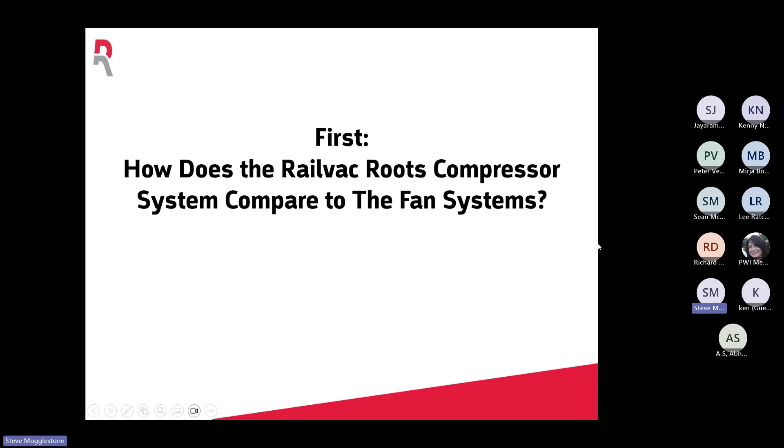So firstly, how does the roots compressor system compare to fan systems? A fan system - I won't go through it too quickly, it's not my forte, but I can send you a copy of this for you to read through. Basically, a fan system uses the auxiliary system on a truck PTO, a power takeoff from a truck, mostly road rail version - nearly all of them are road rail versions - and that powers 2, 3, 4 fans, and it's the fan that generates the airflow. It consumes the most energy when the suction line is open, so as soon as you block the system, the power dies down.

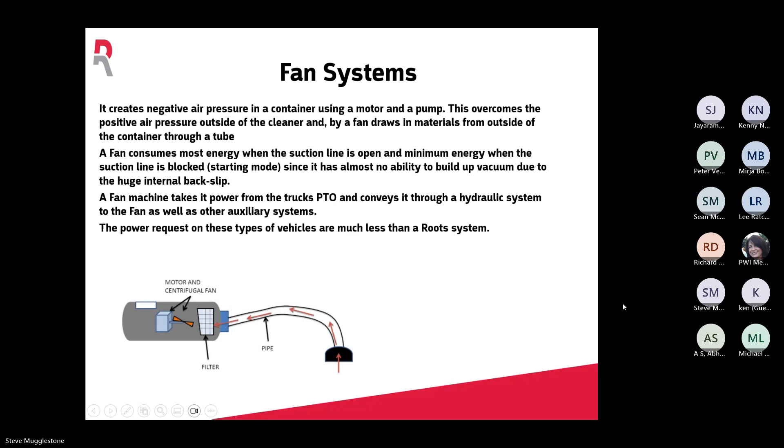The roots system has a big rotor inside, 2 big rotors like a hydraulic pump, turned by a marine engine, a Cat marine engine. So we have an engine to move the machine up and down on the track, and a single engine to generate the airflow. It's 2 intertwining rotors that spin very, very fast - that creates the airflow. If you block the nozzle on this, it builds up the pressure.

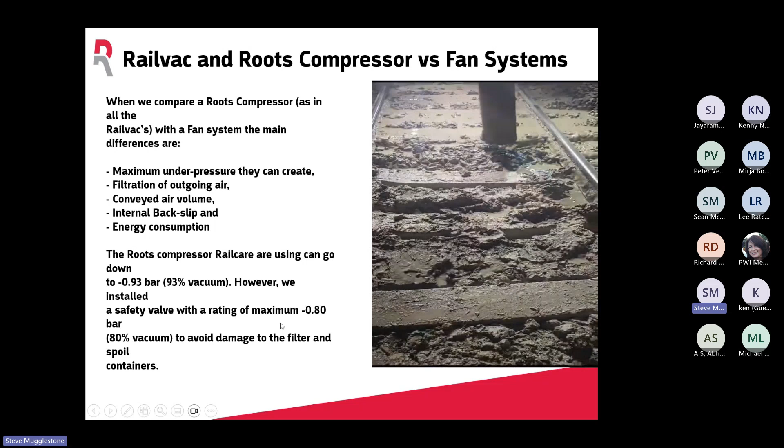So when we compare the roots compressor to the fan systems, the roots compressor generates 0.93 of a bar, 93% vacuum. That's massive power, so we have to install a safety valve and we knock it down to 0.8 vacuum, 80% vacuum, so the filter hoppers and everything doesn't get all sucked in.

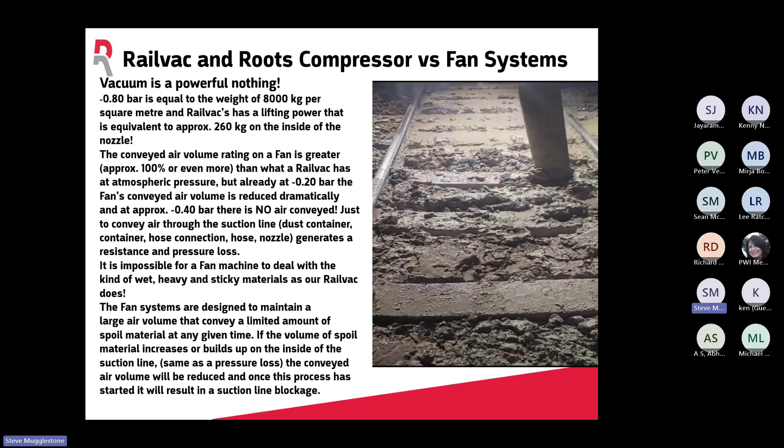I won't read all this to you, I know it can be a bit boring reading text off a presentation, but you'll get this presentation so you'll be able to read through it at your leisure. This is about the air filtration on our machines. It doesn't matter how much filter material we put in there, we control it and take out 99% of all fines passing through. In a fan, the more filtration you put in it, the less power you get at the nozzle.

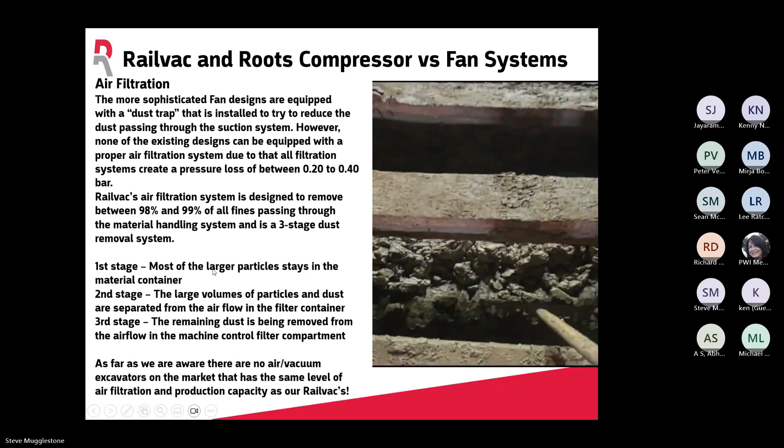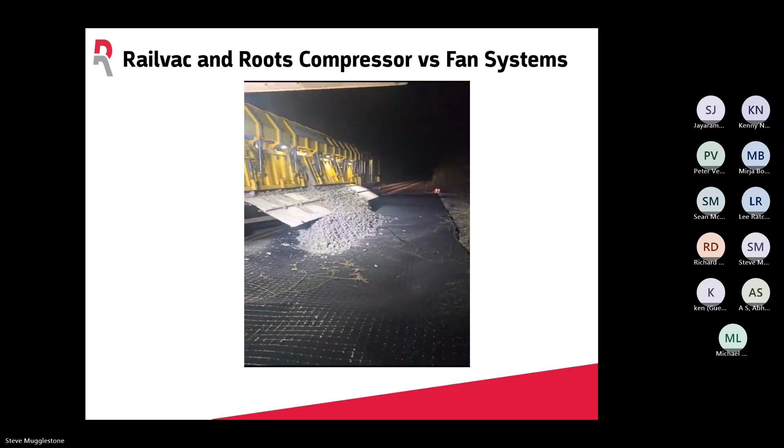There we go - so there you can see us working there. That's it tipping out the sides, it tips out of the sides. And then we're back to work on site. That then is loaded up into a train. Simple process, doesn't take any time.

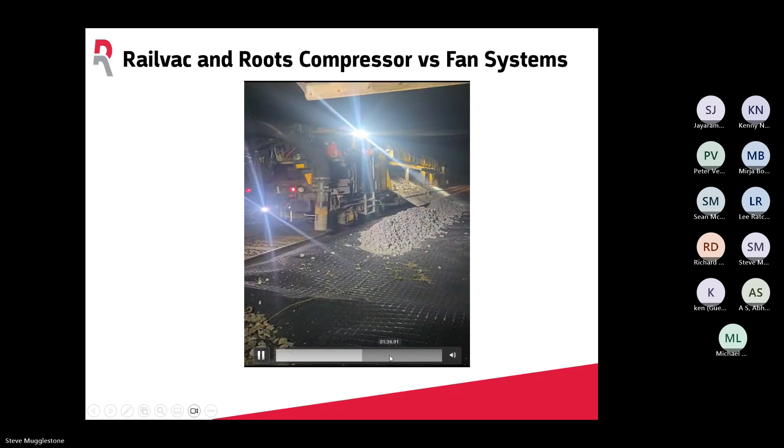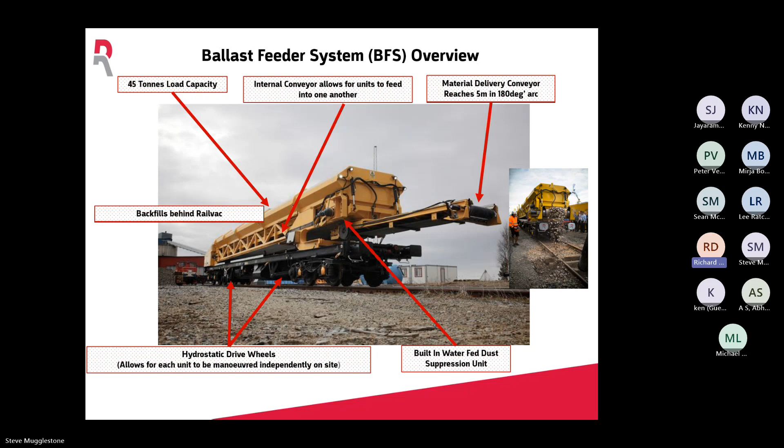And the spoil handling, as you saw in the video earlier, it tips out the side currently, and some people don't like this - they term it double handling, or they don't like the spoil going back on the track side. Typically we'd bund an area with the terram as you saw there, or dig a trench in the 6-foot area and keep discharging the spoil.

And again, what that will do is improve productivity. We don't need overhead line isolations, we don't need to on-track and get machines down to site and back again, thus cutting down the available times you have midweek. Most everything, as you know, is worked weekends only, and it's a bit of a nightmare - it gets congested.

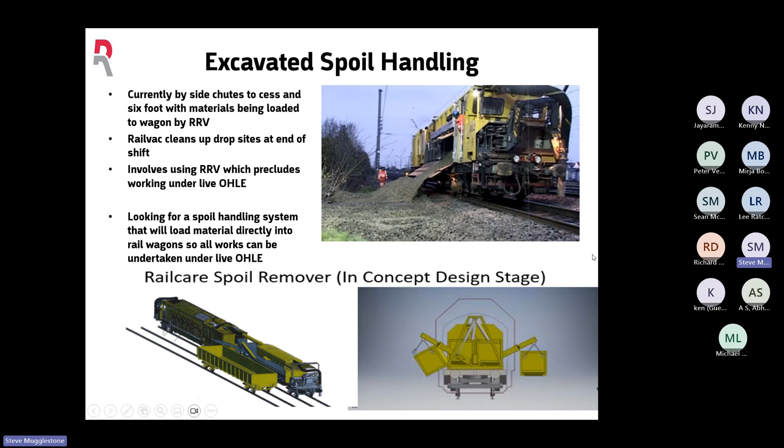This is one of the big things we need to talk about - the quality of the excavation.

Typically when a railvac's been to site, like I say to people, it's basically a big shovel. It'll do what you want it to do, dig as deep as you want, put a crossfall on, etc. But the engineering personnel have got to monitor it and tell it - it's a dumb shovel. If you tell your shovel to dig in some potatoes and you want them 300 mil deep with the tops mounded off, you have to tell it - the machine doesn't do it. So basically, the technical side of it is down to the client and the technical guys on site.

We talk about stiffness and what we do about compaction, and what we do about excavating transition ramps. Well, we can do all of this. We need the transition ramps to avoid sudden stiffness change and ballast memory.

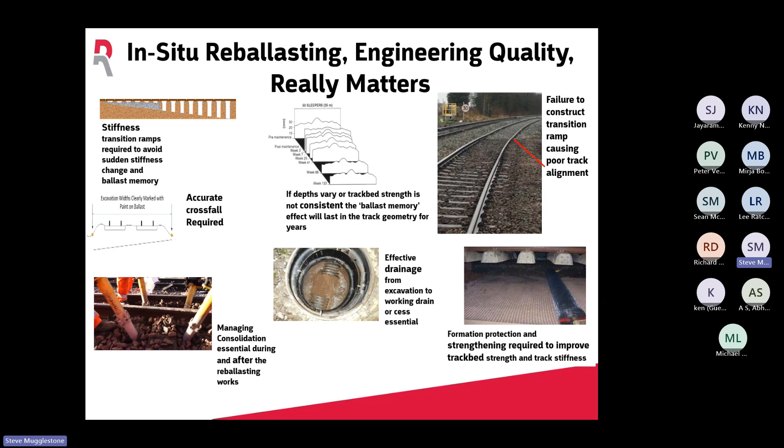So this is the rail vac. Can it excavate design depth and crossfall on the plain line and S&C? Yes, it can.

Can it excavate transition ramps? Yes, we can install them. People say, oh no, we can't get them in. Well, you can. There's a method that we use, and it should be used on every job. But again, alas, it's not, I'm afraid.

Can it excavate the shoulder and cess? Yes, but again, very, very rarely is it ever utilised to do that job.

Can we install filter or strengthening materials? Yes. Can we clean out existing drainage pits or install new drainage? Yes. Can we investigate drainage? Yes.

The client needs to provide technical support to set up the laser for excavation works that we can do. So like I said, we can use 2D laser systems to manage depth and crossfall. We put it on our nozzle and we can work away quite merrily. The rail vac won't do this job for you.

You have to do it yourself. There's just a bit more information - other in-situ re-ballasting systems don't have these capabilities.

I've been out with this machine since 2004, so I see different areas, different people all the time, and it's variable around the engineering quality and delivery throughout the delivery organisations. But it needs to be standardised and it needs to be done in the right way, and it's got to be engineering quality. It's essential that we get that into this, and we can do it.

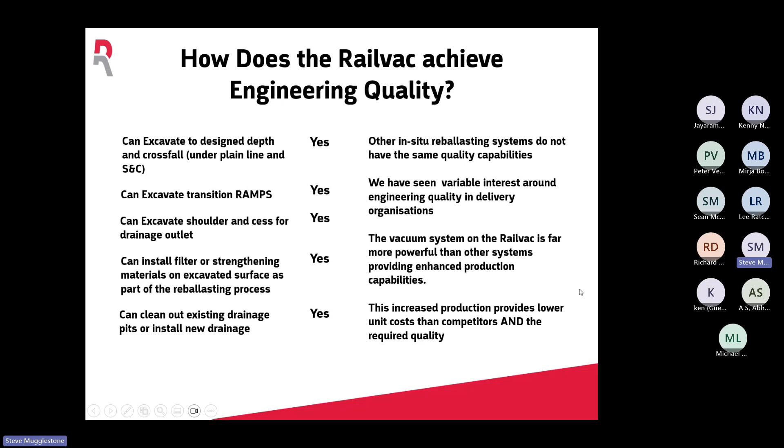Might be worth me getting some information off you then for my engineer to pass on, because we've really struggled with this site - we've had cyclips up, ESRs on it, TSRs on it. It's a real problematic site, but knowing that this kit could potentially do that is another good thing. Oh absolutely, you just contact me and we'll come out and have a look and sort it out for you. That's great, thanks Steve. Cheers, all right Richard, no worries.

So again, this is how we construct the ramps. Basically, mark out the ramp length, whatever it's going to be. Most people stick to the standard - let's just put a 5 meter ramp in. So we mark it out, calculate the number of sleepers - 5 meter ramp, you're talking about seven or eight sleepers. Mark the original positions of the sleepers on the tracks.

You can see there in the yellow marks. Then the track personnel remove the clips, take out the insulators if they're there, and any pads, then put the old clips back in. The rail vac then will dig to the depth.

So if you're taking it over 7 sleepers, it's 300 divided by 7 - you're talking 40 odd millimeters increase in depth, so from 0 down to 300 mil over 7 sleepers. He'll excavate to the required depth, and then what he'll use is the nozzle to just bump that sleeper, because it's got no bearing.

If you need a jack in there, we just ease it with a jack. He bumps the sleeper up, and then he can take off the stools and maintain that rake down into 300 mil. He pushes the sleepers back. The ballast then automatically starts coming in behind us, so as soon as we've got 3 or 4 bays done, that'll be filled up, start filling up with ballast. The guys then will Robel it off.

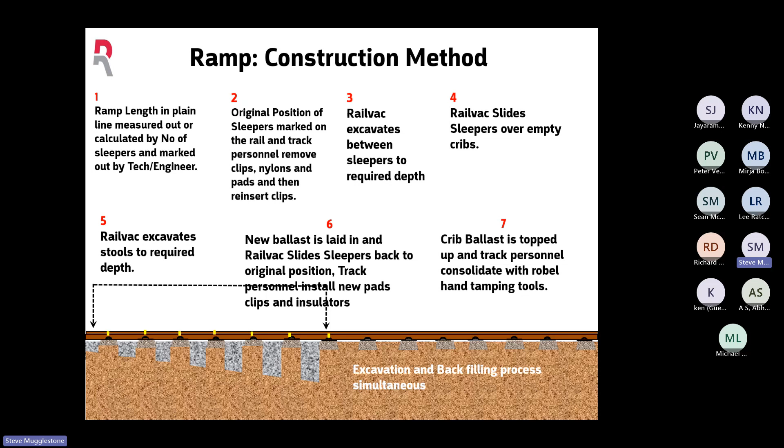We put the jacks in, take out the old clips, new pads, new clips and new insulators, and then we carry on with the 300 mil. It takes about 20 minutes to do a 5 meter ramp, so there's no extra time at all. But people tend not to do it properly - they'll try and put the nozzle underneath the sleeper and say it's been undermined, but it's not good enough.

Depth and crossfall control, as you can see, 2D laser system. There's one on the rear of the nozzle there, which you can't see where the operator's looking. There's another remote sensor on the back that picks up from the front, so you can put 2 or 3 around the nozzle, and you've got sight of what the lights are doing, whether it's too deep, too shallow, or spot on.

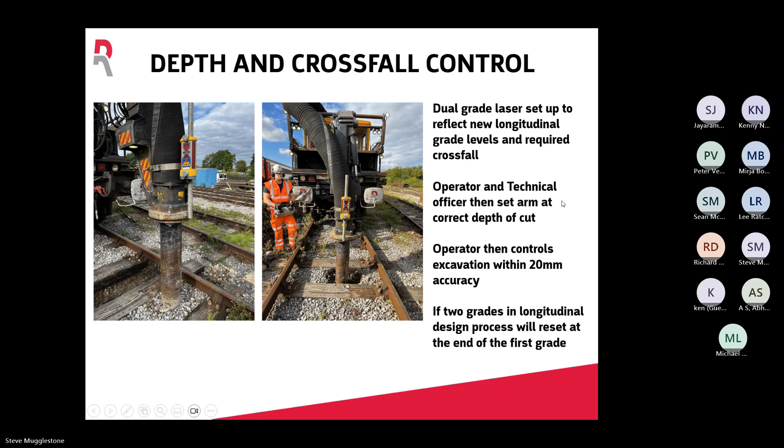So again, we can control the depth to cover another engineering question, and improve the cut surface. We use the rozzle, a rotating nozzle with a tooth on it. It fits underneath the sleepers, helps remove any kind of stool, smooths out the dig, and keeps the nozzle vertical so you can control the depth of dig a lot better and give a smoother cut. And you're not over digging.

So if you want to dig 150 mil on a siding, or 200 mil on a cat 2 track, or cat 1A at 300 mil, then this allows you to do it. That's how we've improved the machine since we first had it back in 2004.

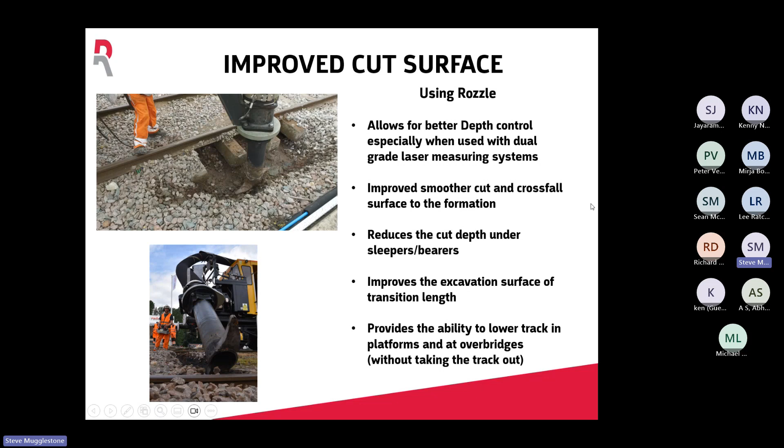And again, results of poor quality. This is a job again - this was up near Hull. This was the day after. This had been re-ballasted, and there'd been some maintenance and refurbishment done through the bearers, etc.

And when they can't improve the track quality on this, the first thing they say to me is it was a rail vac job, and then people tend not to use the rail vacs. But this is the day after we'd re-ballasted through this set of points. You can see the new ballast there.

And yeah, again, these are all the failures: lack of machine excavation control, lack of proper consolidation management, no ramps, no alignment design. And again, they put new timbers in on the heels of these, and you can see the alignment is a little bit poor.

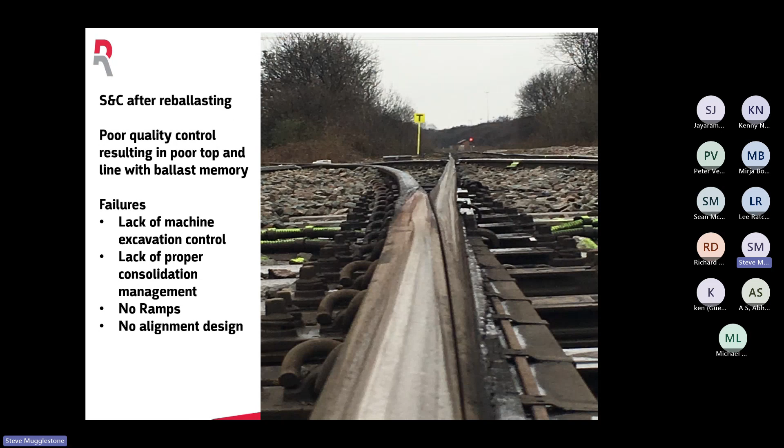So the rail vac digs out ballast, but you have to tell it how to dig it out. And I see this quite frequently - I must have 1,000, 2,000, 3,000 photographs of poor track that's been done under refurbishment. So the rail vac can't line that rail up, that's for sure.

And again, consolidation. It's difficult to consolidate when you're doing track in situ, but when you use different materials like geogrids, geowebs, and basically put all the ramps in, etc., and get the alignment right through the S&C as you've refurbed it, your track geometry should be fine.

It should be absolutely fine. I've handed track back to 80 mile an hour just with rail vacs. As long as you monitor and keep an eye on things, it's quite easily done now. People work on a job at the weekend, walk away from it thinking they've renewed it, and nobody ever maintains it for another 6 months - it's not really the best thing.

So again, it's about - we usually put void meters on, managing the voiding, if any. The most we've ever seen the track drop is 8 millimeters; we've never seen it drop below 8 millimeters. We've never had any incidents where we've had a poor twist due to the rail vac, etc. But consolidation is one of the engineering questions we get asked about. Again, if we do the job correctly with the tools we've got at hand, you should never ever have a problem.

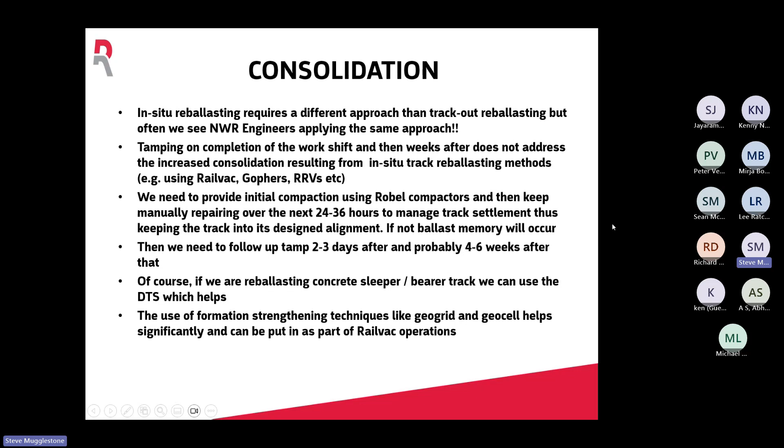So that's basically the engineering quality side of things. And then I'm just going to talk a bit about the versatility. It's not just a one-trick pony - it cuts across all disciplines on the railway, as you can see there: electrification and signalling, drainage, maintenance, plain line, S&C, civils.

So it digs a 1.5 meter cubed trial hole in 5 minutes, yet we still have tens and 20s of guys going out there digging 1 or 2 holes a night, every night. For drainage, it can excavate 40 meters of drainage per hour. We can drop the drainage rates down by about 50% currently, and down to about 70% if we build our new system.

Plain line, as I said, 6 to 10 meters per hour to 300 mil below bearer bottom, sleeper bottom - we can do that. For S&C, a 9.25 crossover, we can excavate and reballast that in anywhere between 8 and 12 hours. A D switch, again, 12 to 14, and so on. These are crossovers, not just a point end.

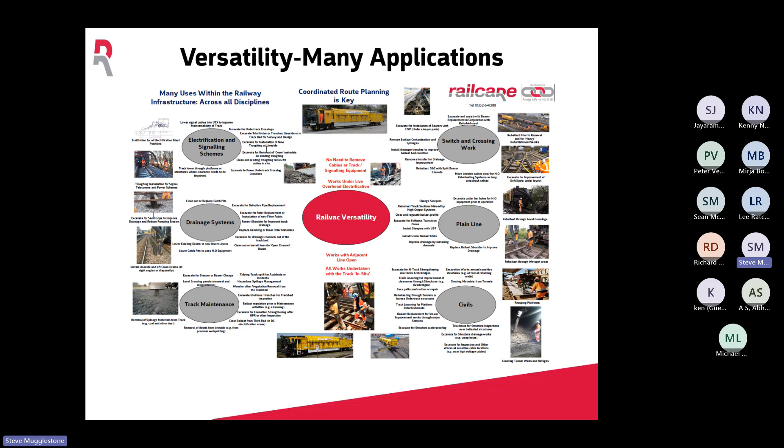And here we've got the activities. Can we do this? This is basically for Network Rail, for the industry. Reballasting, do we do this? Yes, it's used in the UK. Reballasting for plain line refurbishment, not as much as we'd like, although we are getting more and more jobs.

Replacement of sleeper bearers under S&C - we don't do any, manpower still digs it out by hand. We can excavate a 24-foot bearer in less than 9 minutes with 2 cribs and get underneath it in less than 9 minutes.

Refurbishment of drainage, we've done a few. If they go out with the jetting systems and find a blockage, the rail vac could go in there, open it up, change a piece of pipe, lower an invert, raise an invert, change a catch pit, whatever it needs. The rail vac can do that without damaging the rest of the system. Enhancing drainage, the use of DTS 400, we've done some trials of that.

So all these things there, you can see there's lots of yeses, but there's lots of no's.

The computer's died now, it's not clicking on.

So every no on there is a missed opportunity for Network Rail. It's as simple as that. We need to get some joined up thinking and joined up planning, basically.

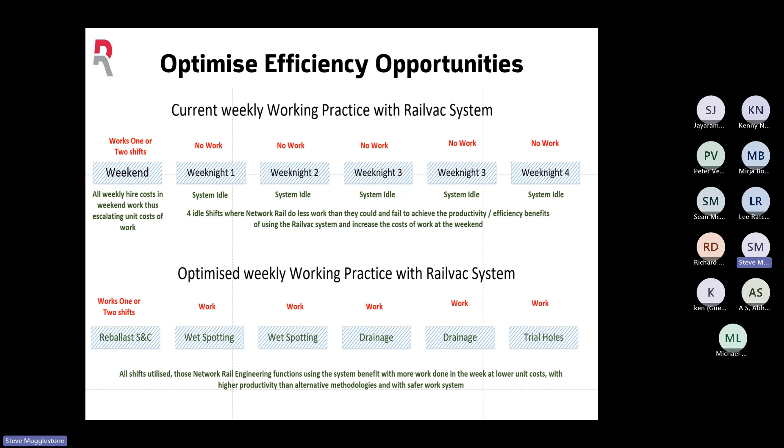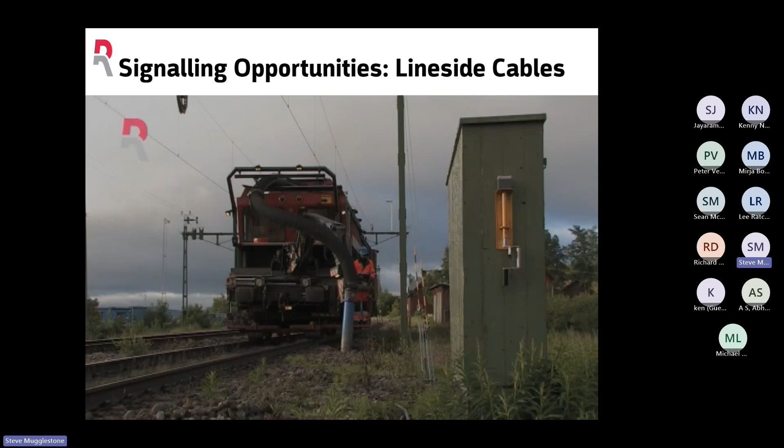And here we have this - us working with line side cabling. In Sweden, they don't bury the cables in ducting, they just bury them out of the way. With the rail vac, because you're not going to damage them, you can open them up. They never get stolen in Sweden, that's for sure. You can see how gentle the machine is. Since 2004, we've never broken a cable or a service that's been attributed to the rail vac on any of our sites.

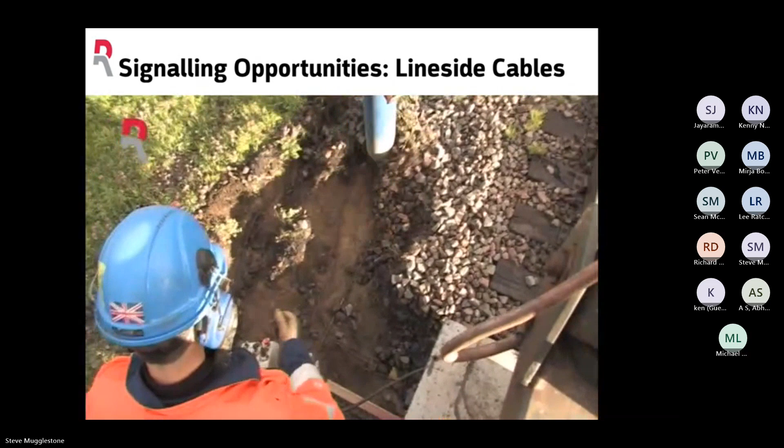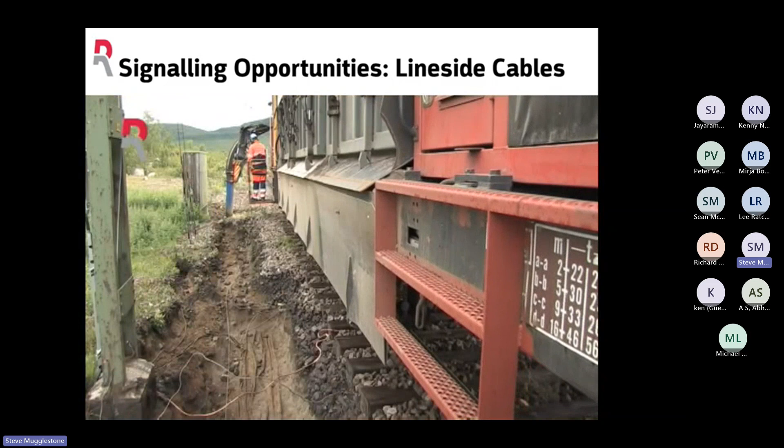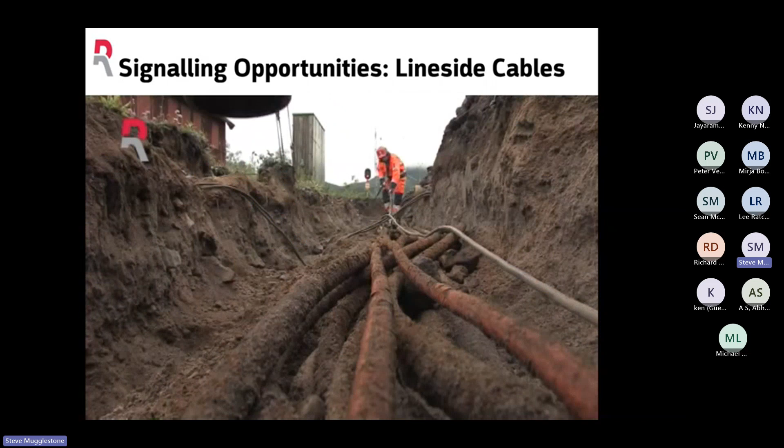So basically the job they're doing here in Sweden is locating existing cables, then they'll move them or bury them or install a new cable prior to any bank profiling, machinery, digging, excavating, track renewals, etc. In Sweden, Trafikverket know exactly where all their cables are, because we go out there, find them, and plot them. We know how far away from the track they are, how deep they are, and the diameter and type of the cable.

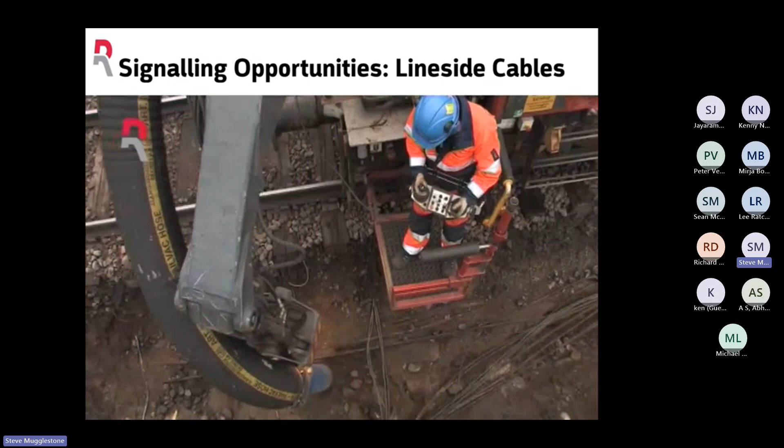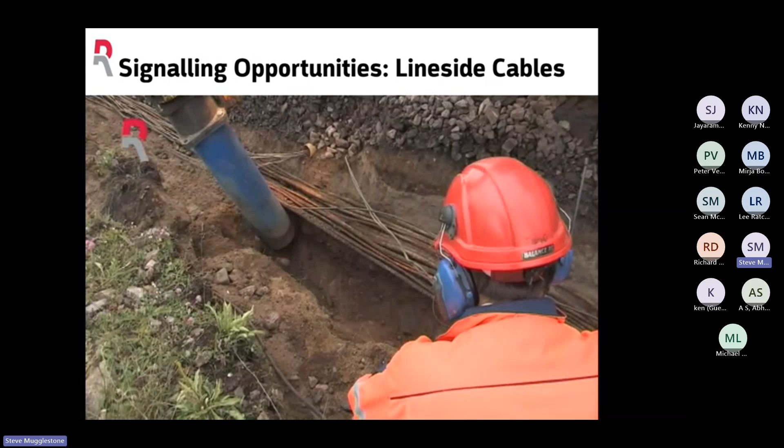So he's just lowering the track now, so when they do the renewal work, you can work quite easily. We've done quite a bit of work locating geotextiles with high output, but like with any renewal or high output system, if you know what you've got in the track before you start, then once we've been out there you can work quite merrily without striking cables, bridge decks and things like that. We can excavate those - it's a simple thing for us to do.

Again, that was signalling drainage opportunities. We're not used on drainage, but we've proved that we can really improve productivity and reduce costs where we've been. These are all the things it can do: maintenance and refurbishment, installing new drainage tracks, enhancing the drainage on a lot of these jobs. It is overlooked, I'm afraid.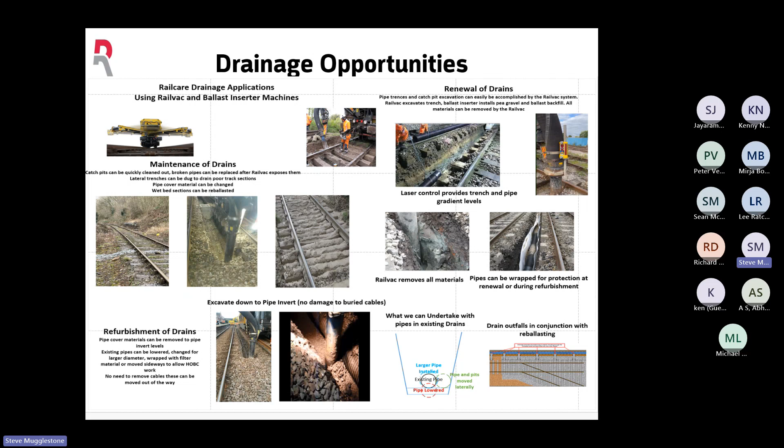It's all right digging 600 meters of plain line if the drainage is no good, but we can combine that along with the reballasting. And again, structures - trial holes there. We did work in Wales, down on the Cardiff Valley lines, doing a 1 cubic meter trial hole. Eventually, when they got their end of things in, we were doing them in about 5 to 10 minutes each.

Drainage trenches - we were doing 5 meter trenches from the end of the sleeper out into the cess, locating all manner of services. There was a high voltage cable they didn't know was there, and a gas service they didn't know was there. But with the Railvac, we located them. Everybody was happy then, they knew where they were, and they couldn't keep up with us with design when we were doing the trial holes for the overhead line structures.

We did one job down there, and then they decided to bring the manpower back in, and they were doing 1 and 2 a night with 10 or 20 men.

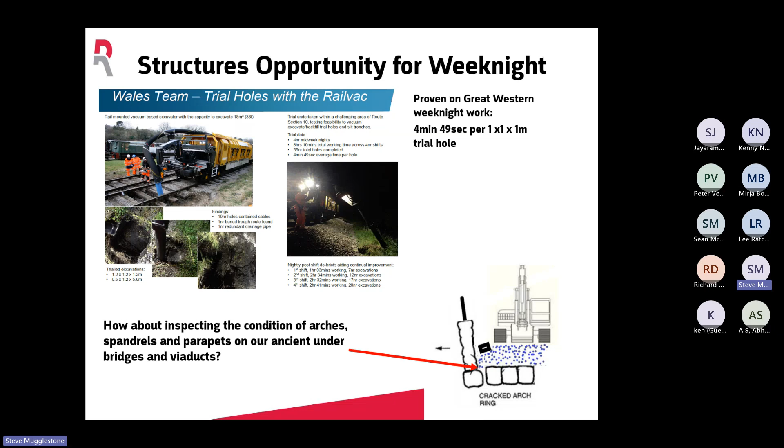So that's a quick run through. In summary, our Railvac is Railcare's most powerful and productive, cost-effective system that's available to the UK rail industry, without a doubt.

It's a proven method. We've been re-ballasting S&C since 2004, and plain line track. Like it says there, we've been serving Network Rail for 20 years this year. It was designed for 7-day working, although it's never been utilised.

It's very versatile, and again its versatility is not optimised in the UK. There's no joined up thinking, there's no joined up planning, so therefore the opportunities are missed.

Work is currently focused on weekend possessions, so the hire rates and production rates are sort of minimised by that. Although on a 24-hour weekend shift, we can knock out some re-ballasting for sure - we'll do a D and E crossover in 24 hours.

We do need more focus on delivery of work over the week. Then we can improve productivity and reduce the costs. And it requires greater collaboration and planning across Network Rail. We'll give the support, no problem with that at all - we do it now. But yeah, it's a great versatile machine, and it's underutilized.

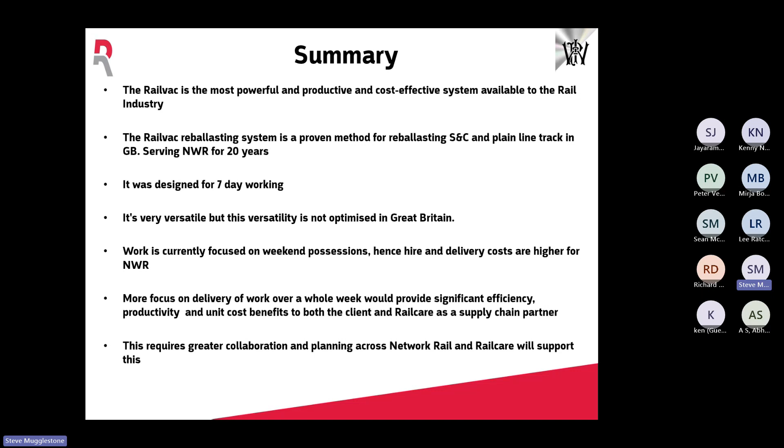And that is the end of the presentation. So if anybody's got any questions, please let me know, and I'll try and answer them as best I can. Thank you very much.

I've got a question, Steve. Has the Railvac ever encountered any soil or material it can't get through? Any really stiff clays or anything like that?

No, not in track. Like I said, with clays, we've dug blue clay down in Didcot and around that area, in Three Bridges. We've dug China clay down in the southwest. There's nothing stopped us at all within track. We've even excavated glued ballast. So inside the track envelope, we've encountered nothing that we can't dig. It'll even break up sandstone.

It won't, of course, touch the harder rocks, but it has excavated sandstone up around Rotherham and Sheffield Station. So yeah, there's nothing - it increases the power. Like I said, when we're digging out clay, it'll go into the clay and pull out big bungs, whereas the other systems, the fan systems, the power dies. So then you've got to manually agitate the track with water or with air lancers.

No, nothing, because the heavier material drops straight into... as you see in the machine there, when I go to where the machine is highlighted there for you - there, you've got these, I don't know if you can see my cursor, but there's two sections at the front there, they're the material hoppers. In that rear hopper there's filter membranes, a series of filter membranes that sit down, and as the air is pulled through here, all the heavy material drops there, all the dust etc, then is taken through this filter system before it's out there into the air again.

Right, so it's in there. It's like they hang like curtains in there, big, the width of the machine basically, and they go from, I don't know, a bit like geotextiles right down to real micro mesh HEPA type filters at the back.

But again, like I said, we've got that much power it doesn't stop us from working, excavating the clays etc. With a fan system, the more filtration you have in it, the less power you get at the nozzle. If you're 100 meters away with a long tube from the main unit, you've probably got a third of the power you actually have when you're right on top of the machine. Whereas ours, we could put a 200-foot nozzle on the end, or a 300-foot, and the airflow is constant - it doesn't reduce any.

All right, bloody hell. Any questions from anybody else?

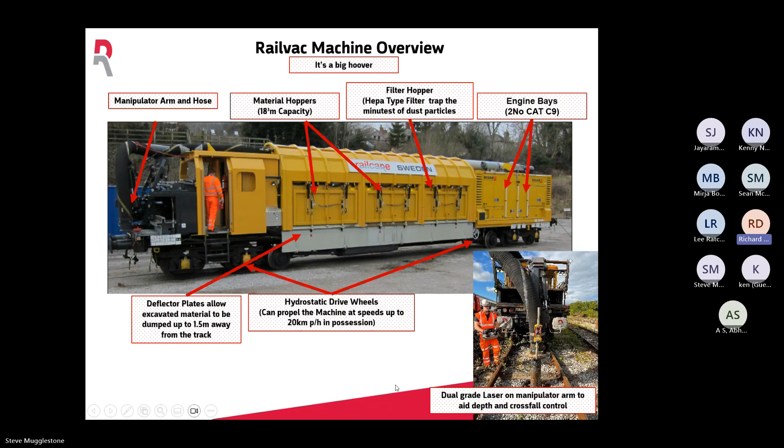Let me just - I've got - just give me a second. Okay.

I've got some - I mean, another quick one - are you on Coombe then, Steve?

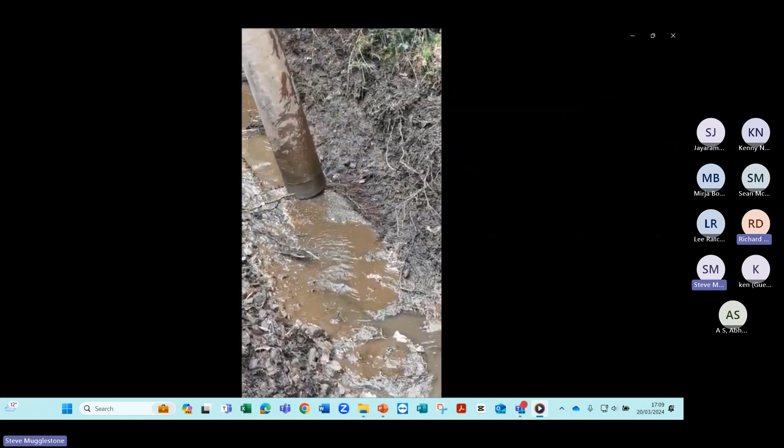No, we're not on Coombe. What you do is - this is channel drain, look, I'll show the video. You'd order us off Enroll, so you'd have to order a train. We order the loco, we'll come on the loco.

And it's ordered through, but I'd come out to you and say, right, okay, you've got X amount of drainage to do, or wet spots or whatever, and I'd say it's going to take us this long to do it. I'll produce you an estimate - see him there, look. I'll produce you an estimate, and then you produce a PO.

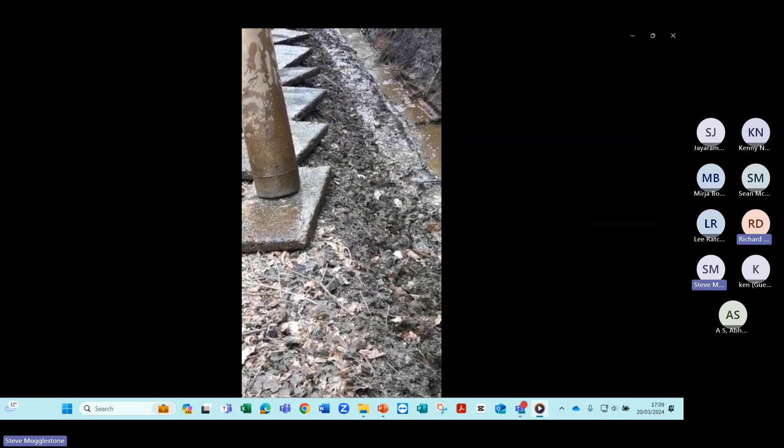But what we want to do is get this machine working 7 days a week, so then it becomes like an RRV. If we get X amount of shifts per week, per year, it makes it easier for you guys, and you can do what you want with it.

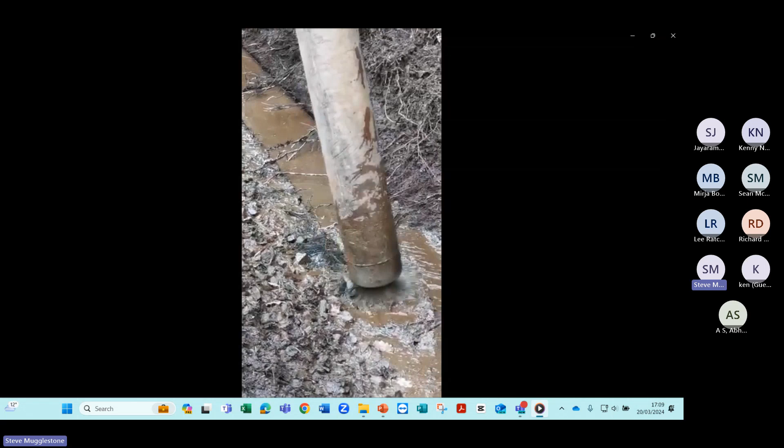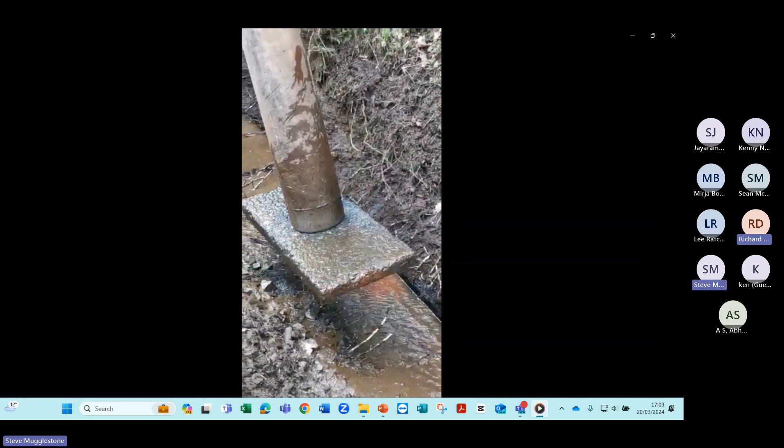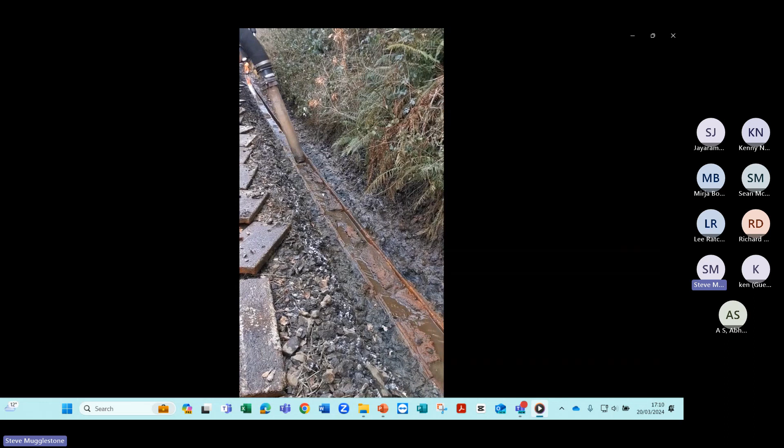Other than that, we have to - it costs more money. Although, like I said, people say the machine is expensive - it'll cost £6,500 for a midweek shift - but then they say, well, you've got to have a loco on. But what they don't look at is we're doing 30 wet spots a night in a normal 3 hour, or another normal 5 hour possession. So the unit rates come down massively. I mean, wet spots - I don't know how much it costs you to remove a wet spot with an RRV.

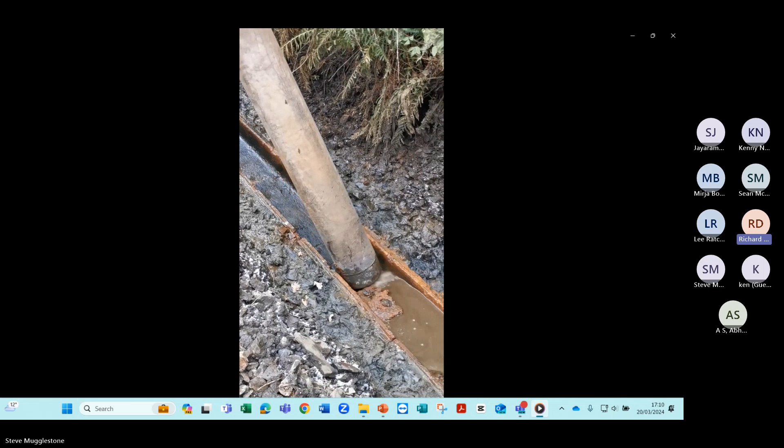Yeah, that's what I need to look at now, because now I know it's more versatile as well - I can see everything there. It's working out, because we struggle now, as we have to work with isolations and this happening with the RRVs. But if your kit can work live as well, then we're probably going to get more productivity out of that shift than we do at the moment. So I think we really need to start looking into it more.

I've just done some price comparisons for doing it traditionally with an RRV and the slotted bucket, versus the train materials and our ballast feeder, and I can tell you now we're over 50% less in unit costs. And if we have a spoil handling system where we can work with just one RRV, all it's going to do is come to site, load up the spoil. We'll have been digging for 2 hours, had out 20 wet spots in 2 hours. He's got to come down, load the spoil, then we attach to the train and go. So even with the cost of an RRV, it's still a massive reduction in unit rates.

Like I say, we need to look into it more. I don't really know Network Rail, especially now, it's a different kit than we thought it was years ago. I can definitely share that information with you, Richard. There's no problem with that, mate. I'm doing it hopefully to get to the RAMs and the route directors with this kind of information. Yeah, if you can share some information, that'd be great.